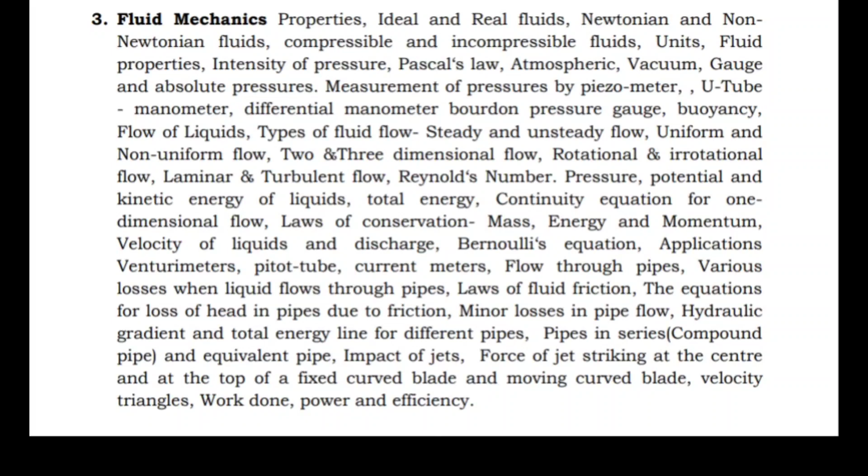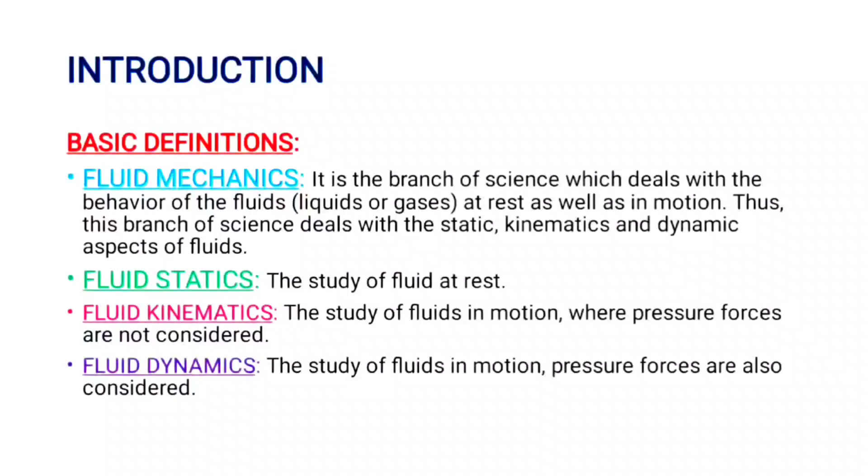What is meant by fluid mechanics? It's a branch of science which deals with the behavior of fluids at rest as well as in motion. Fluids are nothing but liquids or gases.

The study of fluids at rest is called fluid statics. The study of fluids in motion where pressure forces are not considered is called fluid kinematics. The study of fluids in motion where pressure forces are also considered is called fluid dynamics.

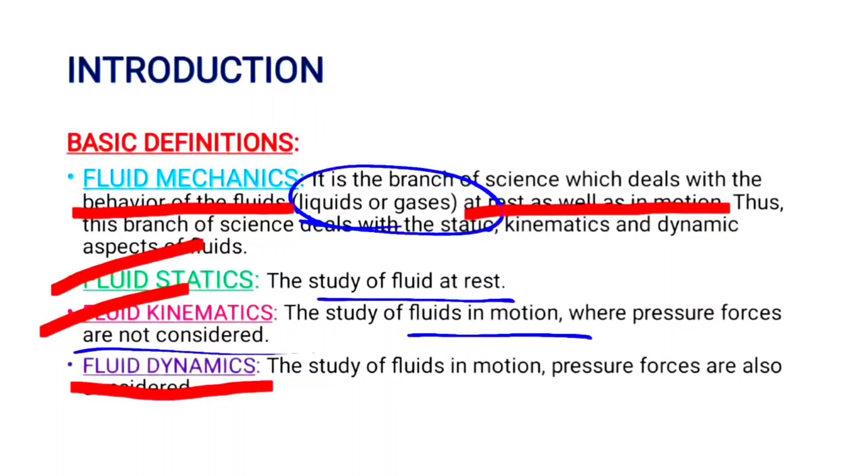The next topic is fluid properties. In that, density, also called mass density, is defined as the ratio of mass of fluid to its volume. It is denoted by the symbol rho.

Mathematically, rho equals mass of fluid by volume of fluid. Mass is measured in kg, kilogram. Volume is measured in meter cube. The unit will be kg per meter cube.

Dimensions - how to write dimensions? Based on the unit only you write dimensions. Dimensions are written in MLT form. Here M refers to mass, L refers to length, T refers to time.

Mass, unit of mass is kg. Length unit will be meter. Time unit is second.

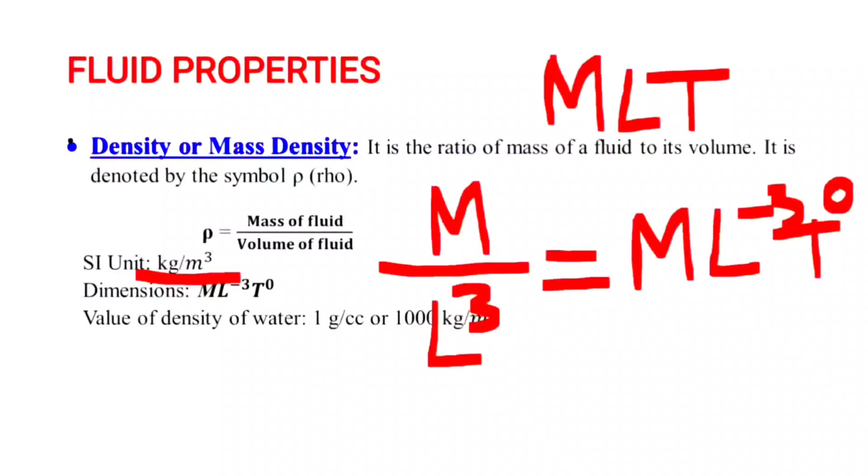So the dimensions for mass density is written as - it has the unit kg per meter cube. Write in dimensions as m by l cube, that equals in MLT form m l power minus 3 t power 0. I hope it is understood how to write dimensions for mass density.

The value of density of water is 1 gram per cc or 1000 kg per meter cube. In numericals also, if the density of water is not given, you take 1 gram per cc or 1000 kg per meter cube.

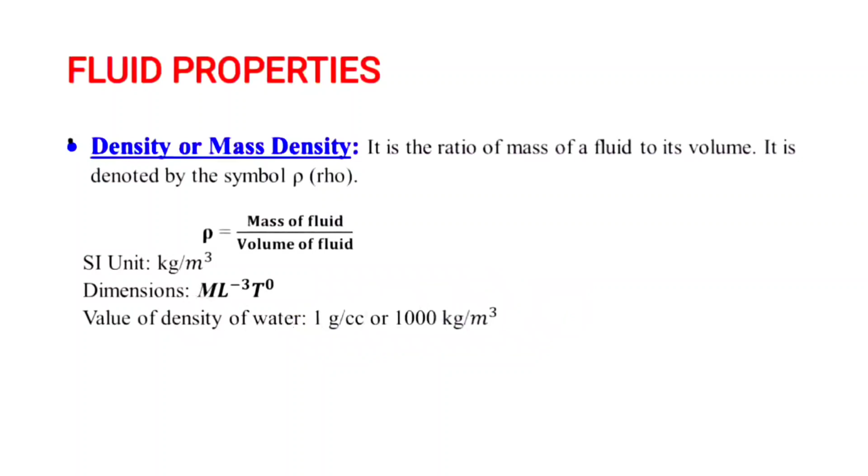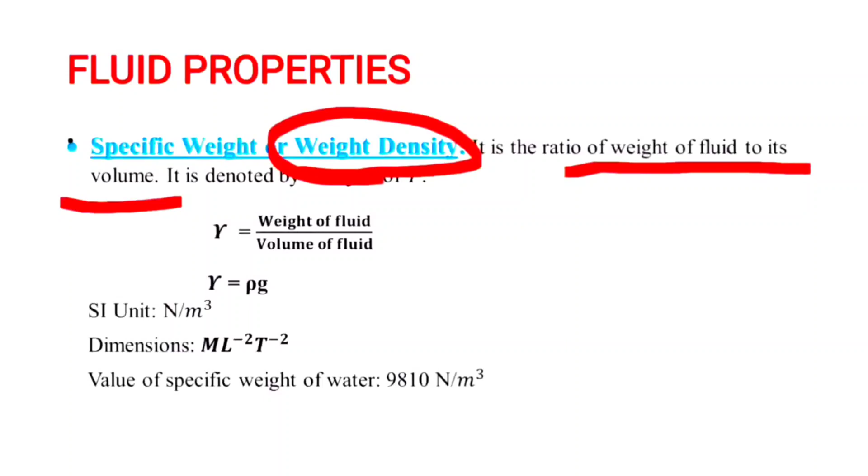The next fluid property is specific weight, also called weight density. It is the ratio of weight of fluid to its volume, denoted by the symbol gamma. Gamma equals weight by volume, weight of fluid by volume of fluid.

There is a relationship between weight density and mass density. Weight density equals mass density into acceleration due to gravity. If acceleration due to gravity is not given in the problem, it is 9.81 meters per second square.

SI unit for weight density is Newton per meter cube. SI unit is a derived quantity. In India, we have two systems of units. One is MKS unit, second one is CGS unit.

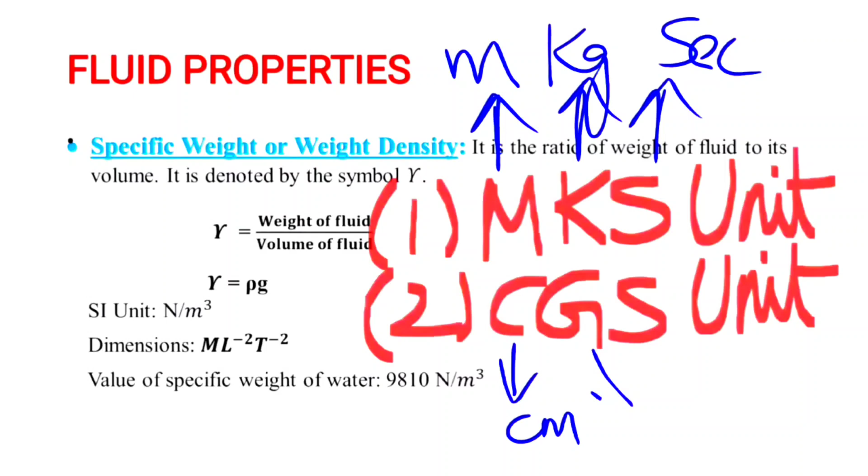M refers to meters, K refers to kilogram, S refers to seconds. In CGS, C refers to centimeters, G refers to grams, S refers to seconds. Hope it is understood.

It gives M L power minus 2 T power minus 2. Dimensions also clear now. The value of specific weight of water is 9810.

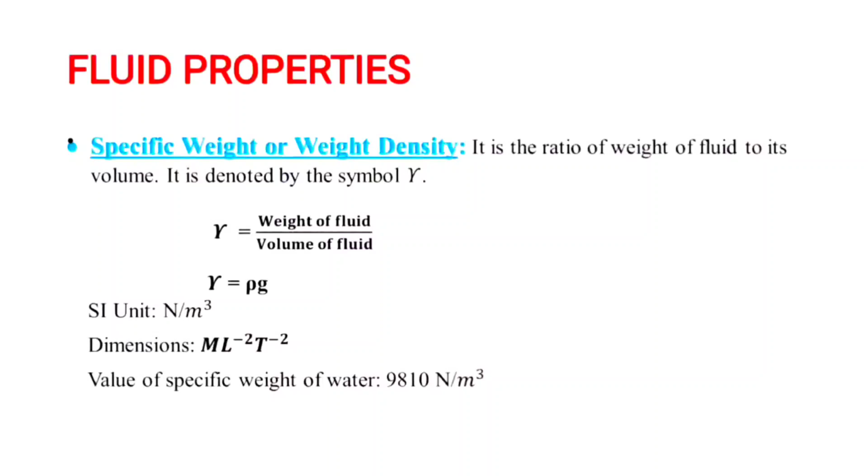The next fluid property is specific volume. It is defined as the ratio of volume of fluid to mass of fluid. Another way of defining it is volume of fluid occupied by a unit mass. Mathematically, specific volume equals volume of fluid by mass of fluid, that equals 1 by rho.

Specific volume is reciprocal to mass density.

The unit for specific volume is a reciprocal. Rho has units of kg per meter cube, so the units for specific volume is meter cube per kg.

Dimensions, how to write and derive dimensions, we see for the two quantities, mass density and weight density. In the same manner you derive the dimensions for specific volume also. It is commonly applied for gases, not for liquids.

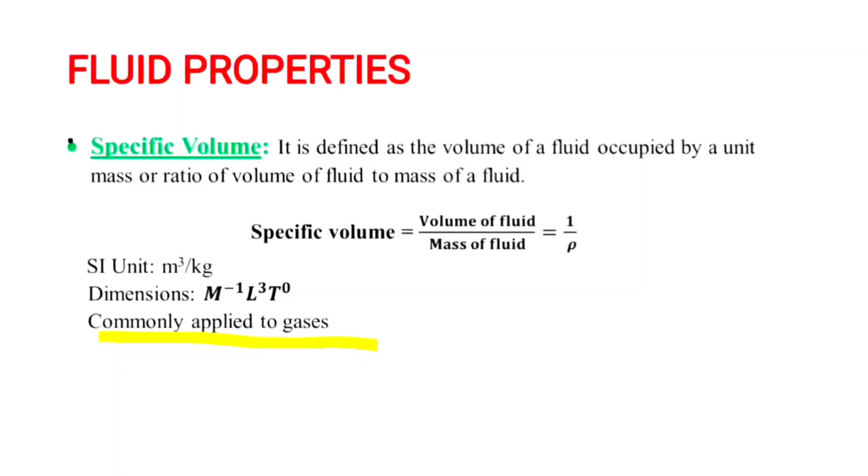Specific gravity is defined as the ratio of weight density of a fluid to weight density of a standard fluid, or the ratio of density of fluid to density of standard fluid. It is also called relative density.

It is denoted by the symbol S. What is standard fluid? For liquids, if you calculate specific gravity, the standard fluid is water. If we calculate specific gravity for gases, the standard fluid is air. In mathematical representation, S is equals to weight density of fluid by weight density of standard fluid.

For example, I have a specific gravity of oil and I need to find mass density of oil. So what is the formula I use? S is equals to rho of oil by rho of standard fluid, that is water.

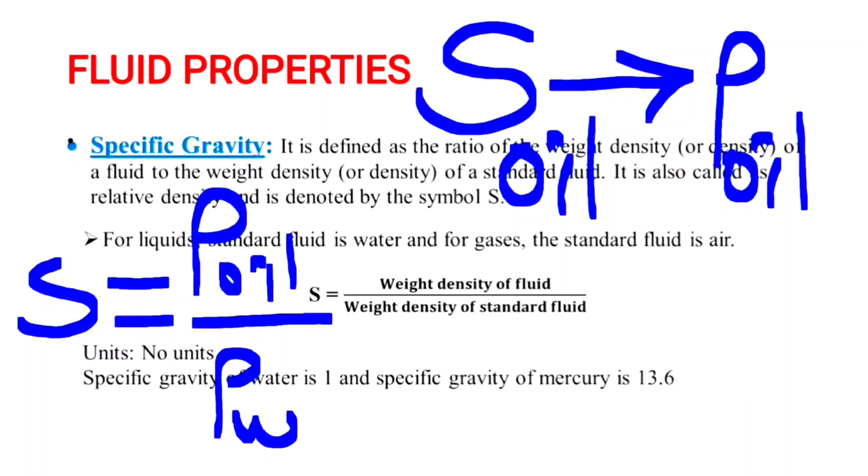It has no units because weight density by weight density or mass density by mass density, same quantity is in ratio, so there is no units for specific gravity. Specific gravity of water is 1 and specific gravity of mercury is 13.6.

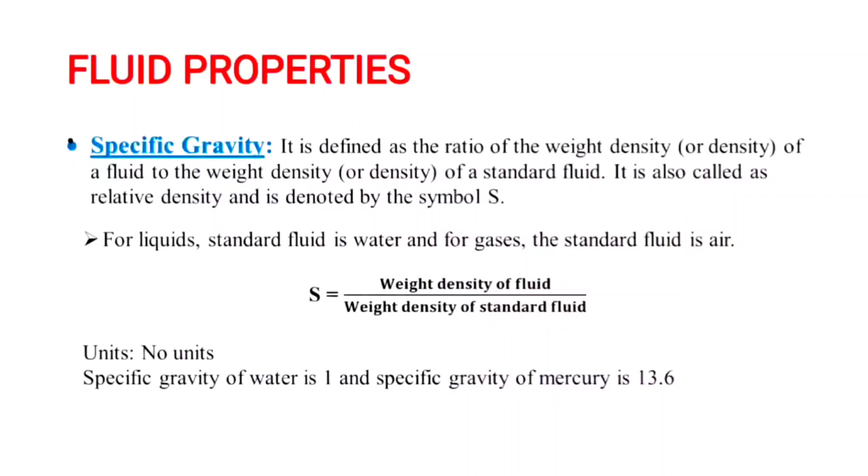The next property is viscosity. What is meant by viscosity? It is defined as the property of a fluid which offers resistance to the movement. Movement refers to the flow, meaning viscosity is a fluid property which offers resistance to flow.

Of one layer of fluid over another adjacent layer of fluid.

For example, it is a bed of canal. This is the particle of water, and this is also a particle of water. It tries to move in this direction, the flow is in this direction. It tries to move in this direction, but some force or resistance has to stop the flow of the bottom particle of water. This is due to viscosity.

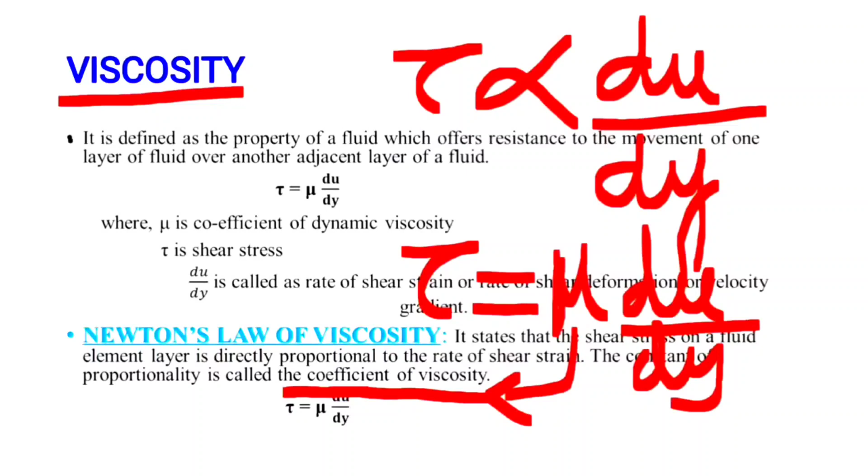What are the terms? Tau is called shear stress. Du by dy is called rate of shear strain, or rate of shear deformation, or velocity gradient. It has three names: rate of shear strain, rate of shear deformation, or velocity gradient.

The proportionality constant mu is there. Mu is called the coefficient of dynamic viscosity.

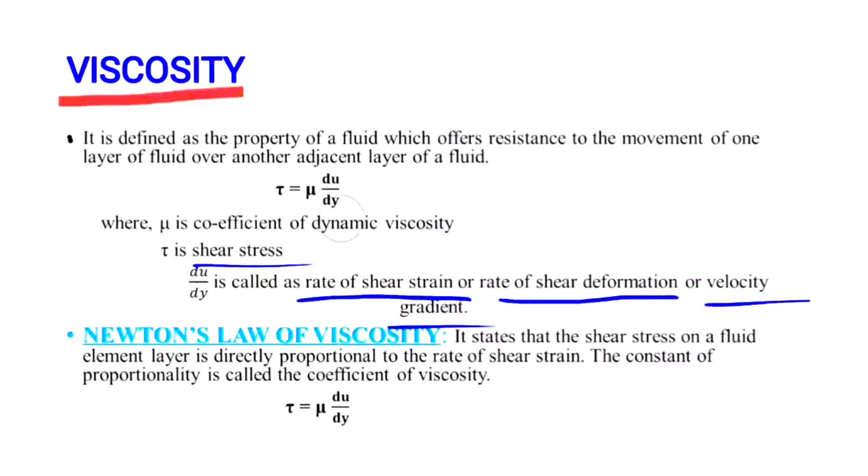The next topic is units. See the definition of viscosity, Newton's law of viscosity also. See the units of viscosity, that is mu. Tau by du by dy has units of Newton per meter square. Velocity u is meter per second per meter. Meter gets cancelled, giving Newton second per meter square as the unit for dynamic viscosity.

You know that force has unit of newtons. Pressure is units of Newton per meter square. That is also called as Pascal.

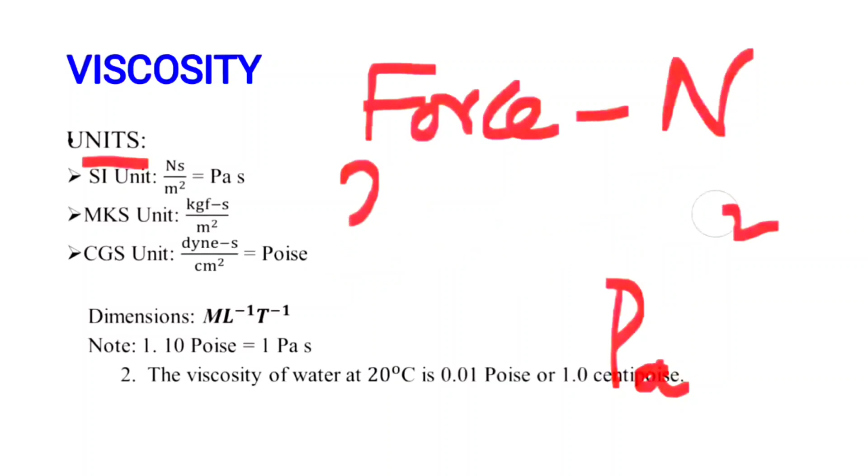This Newton second per meter square is written as Pascal into seconds. That is the SI unit. This is derived quantity. MKS unit will be, in MKS unit, Newton is written as kgf.

In CGS unit, Newton is written as dyne, that is gram force. So the MKS unit will be kgf second per meter square.

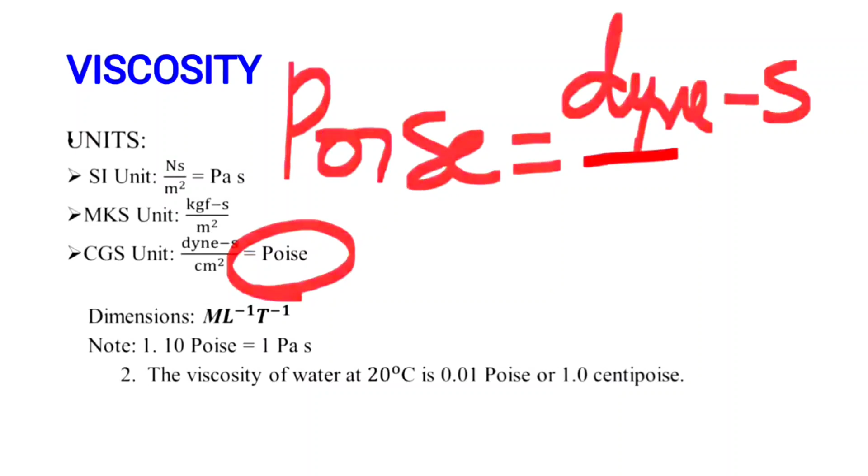CGS unit will be dyne second per centimeter square. That is, CGS unit for viscosity is poise. Poise is equals to dyne second per centimeter square.

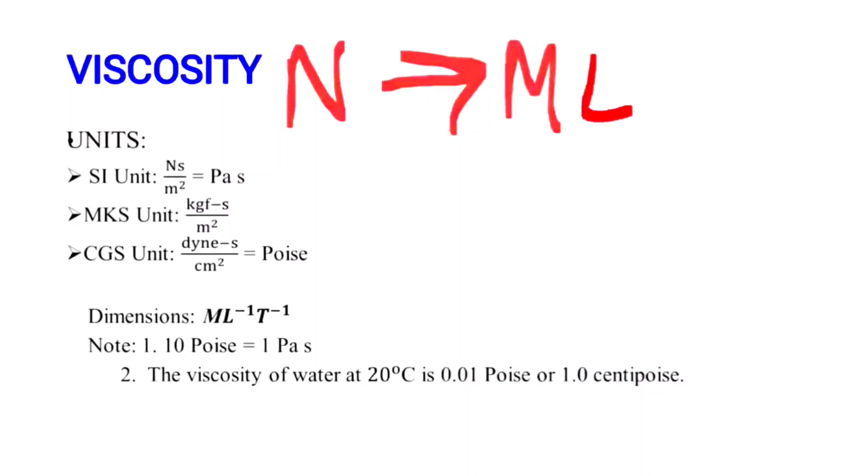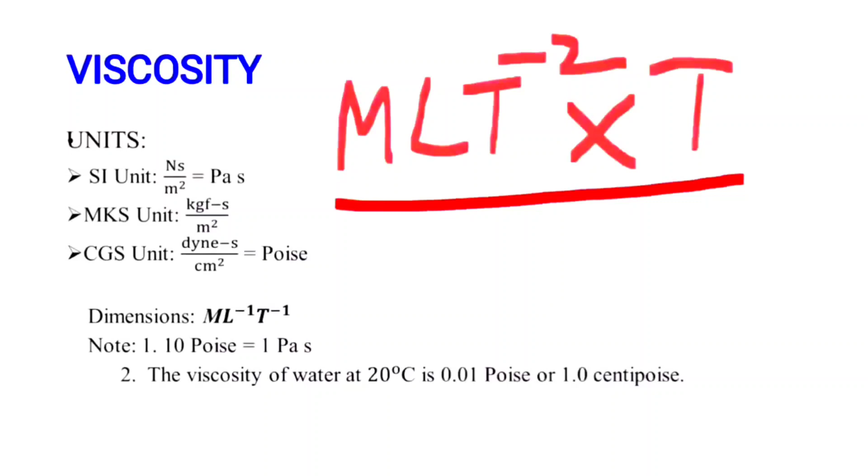It has dimensions. Newton has dimensions of mlt power minus 2. I know how to write dimensions in the previous two quantities, so I directly write the dimensions for viscosity. N has dimensions of mlt power minus 2. S has dimensions of t. M square has dimensions of L square. So the dimensions are mlt power minus 2 into t divided by L square, that is equals to ml power minus 1, t power minus 1. It is the dimensions for viscosity.

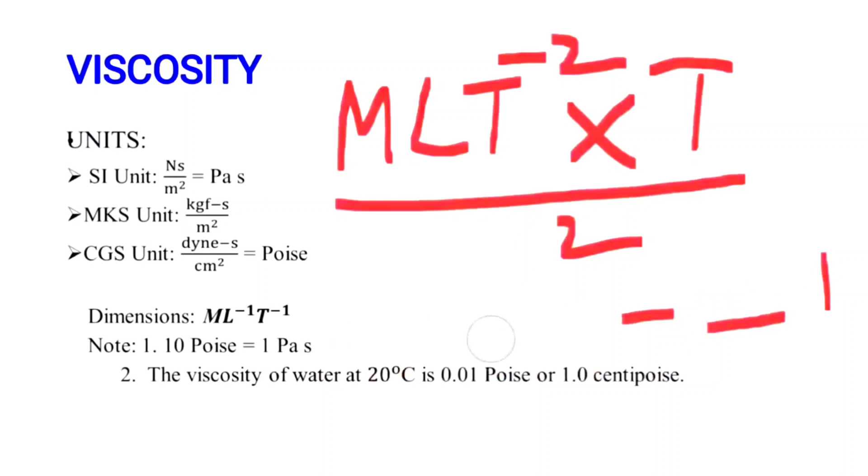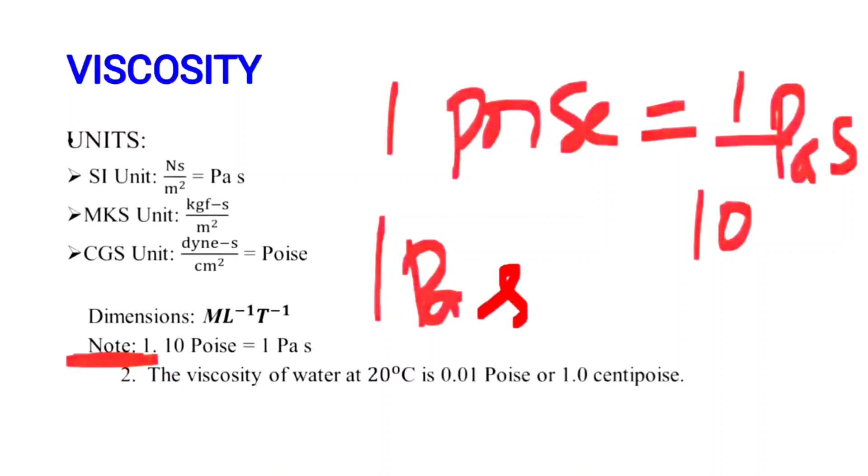Next one is note. That means you have to remember these points for your problems or in direct MCQs also. One poise is equals to 1 by 10 Pascal second. So 1 Pascal second is equals to 10 poise. The second point is viscosity of water at 20 degrees Celsius is 0.01 poise or 1 centipoise.

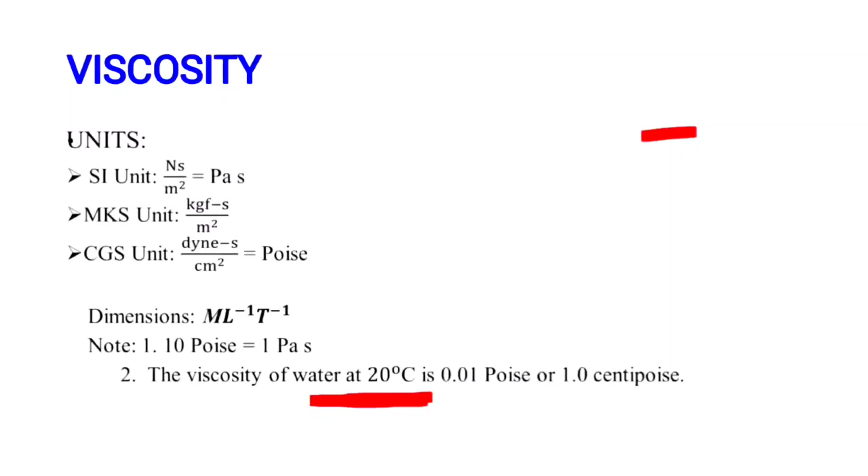Next topic is kinematic viscosity. Kinematic viscosity is defined as ratio between dynamic viscosity and density of fluid. Dynamic viscosity by density of fluid is called as kinematic viscosity. It is denoted by the symbol nu. Mathematically, nu is equals to viscosity, that is dynamic viscosity by density of fluid.

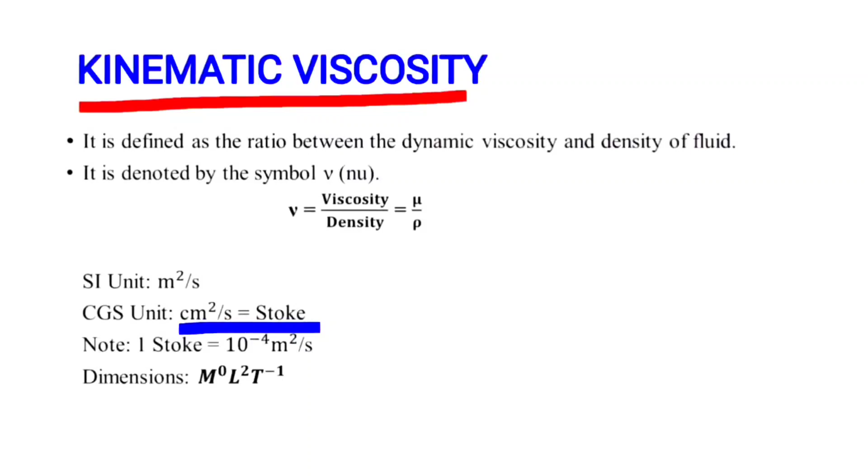I hope this is understood. This is the SI unit or MKS unit. The CGS unit will be centimeter square per second, that is Stoke. 1 Stoke is equals to 10 to the power of minus 4 meters square per second. Dimensions: meter square has dimensions L square, per second T power minus 1.

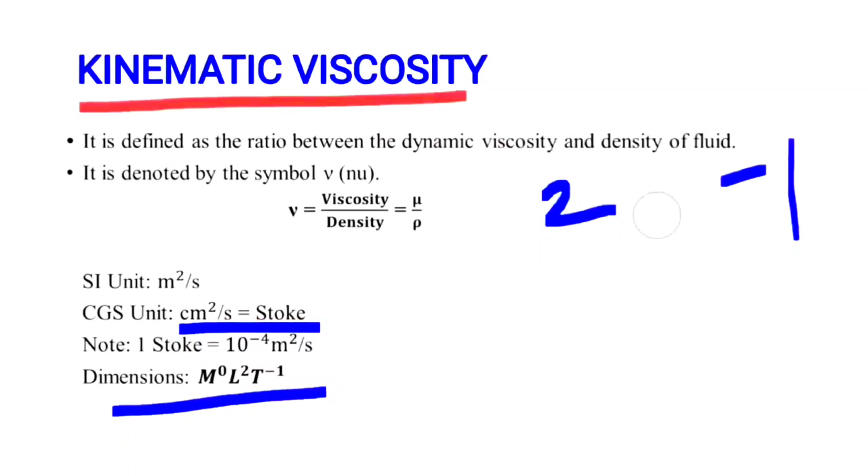Next topic is variation of viscosity with temperature. Temperature affects the viscosity. Viscous forces in fluid are due to cohesive forces and molecular moment transfer. What is meant by cohesive force? Cohesive force refers to the force of attraction between the same particles, like water.

For example, Hg, mercury. Mercury has the same molecules, has more force of attraction between cohesion. So in mercury, cohesion is more than adhesion. Adhesive forces refer to the force of attraction between two different substances, that is water and paper. Adhesive forces.

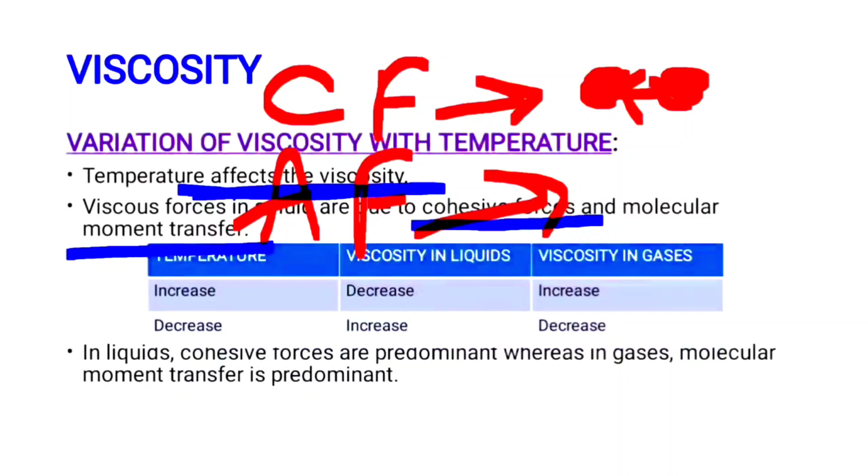And molecular moment transfer. If temperature increases, how does viscosity of fluids change? Fluids are liquids and gases. In liquids, cohesive forces are predominant, that is more, cohesive forces more than molecular moment transfer. Whereas in gases, molecular moment transfer is more than cohesive forces. So viscosity in liquids decreases when the temperature increases.